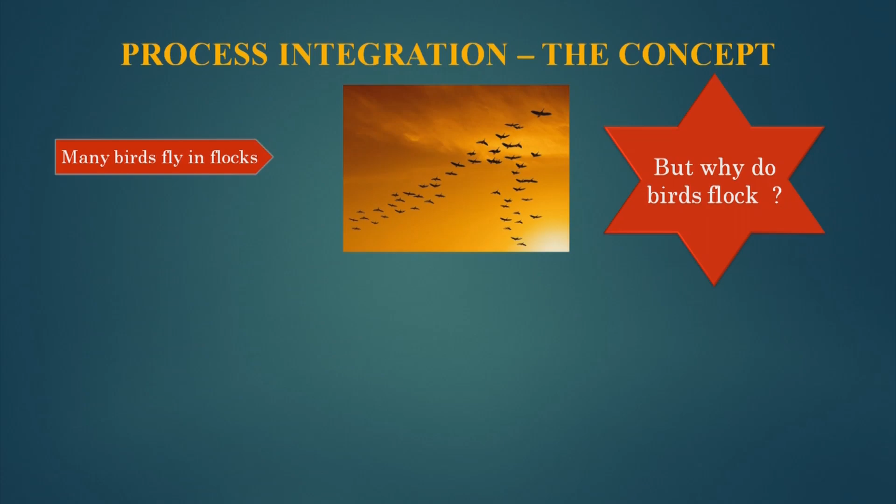There are a number of social factors for this, which include reproduction, protection from predators, communication and navigation, etc.

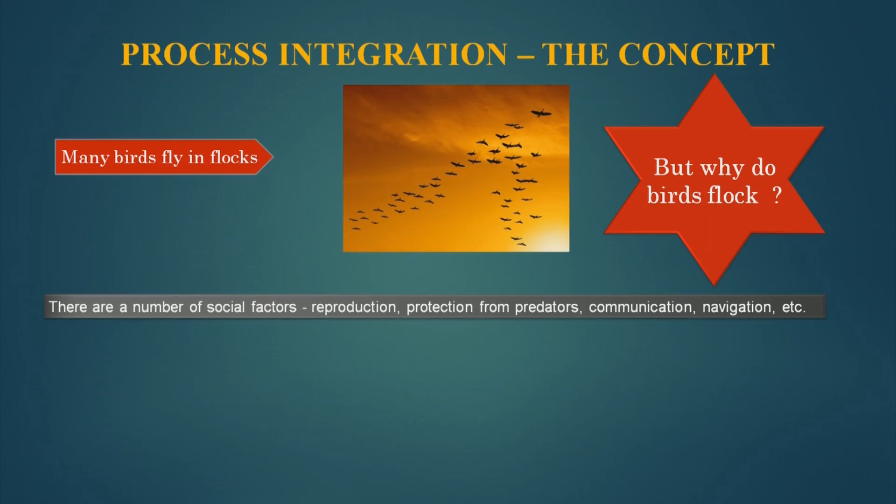But let us look only at the aerodynamic factors for the time being. One theory is that there is an aerodynamic advantage to flying behind and to the side of another bird, to take advantage of its wingtip vortices.

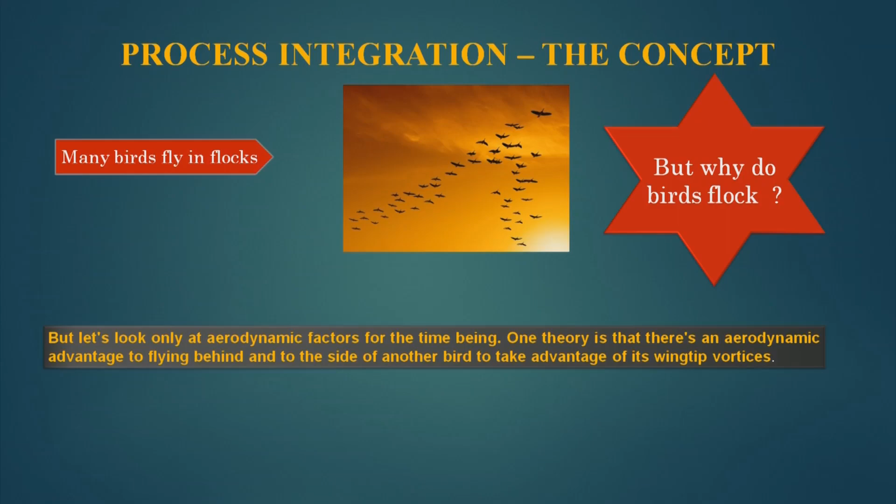Birds fly in a V shape to help conserve their energy during migration. With the exception of the individual leading the group, each bird trailing behind the other benefits from a reduction in wind resistance. This formation reduces the drag force that each bird experiences compared to if it were flying alone.

So it clearly tells that if birds are flying in flocks, they conserve energy, or the per unit consumption of energy, that means consumption of energy per bird in a flock, is less. This is for flying.

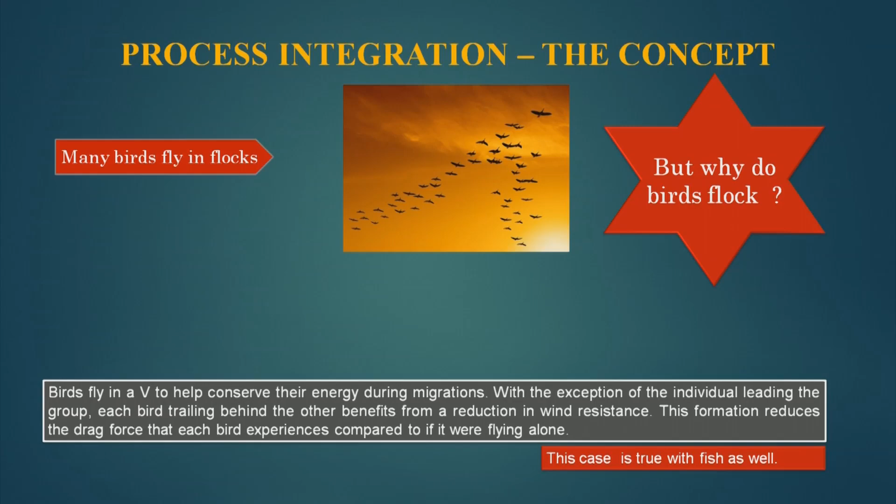The same phenomenon we can see in nature when fish swim. So let us take the case of the fish. Fish swim in schools, and why does this happen? They do this mainly because of two simple facts of nature: one, big fish eat little fish, and two, there is safety in numbers.

The size of the shape and often the flashing of light reflected off thousands of the fish can confuse the predator, but being in a school also means that predators cannot generally eat the lot, and so significant numbers survive.

But these are not the technical reasons for it. So let us see the technical reason why fish swim in schools. There are other reasons for fish to swim in schools.

One reason is that as they swim, their tails sweep from side to side. They set up tiny whirlpools or vortices in the water, which effectively reduces the friction for each fish neighbor. Less friction means less effort, and energy is reduced in swimming.

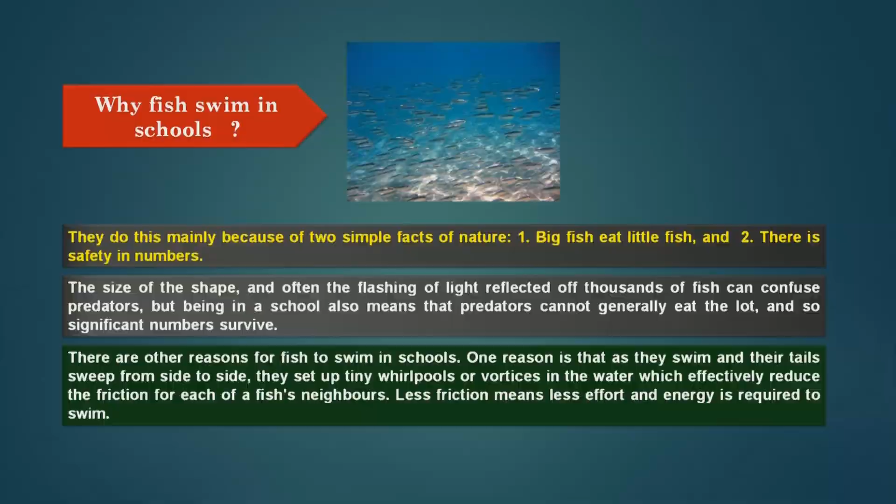That means the techniques which these animals, birds and fishes, apply in nature, there is an inherent concept of integration in them. So when they integrate their flying styles, integrate their swimming styles, they consume less energy. This is also...

Other examples can show this too, like joint family. If we take a joint family, we find that expenditure per person decreases, stress level per person also decreases, and logistics requirement per person also decreases. So joint family, which is an integration of individuals, due to this integration we see these benefits: expenditure decreases, stress level decreases, and logistic requirements also decrease.

A latest concept is aquaponics, where we integrate fish farming with vegetable growing. The fishes help the vegetables grow, and the vegetables also help the fishes in terms of their food. So in nature there are a lot of concepts available where integration helps each other.

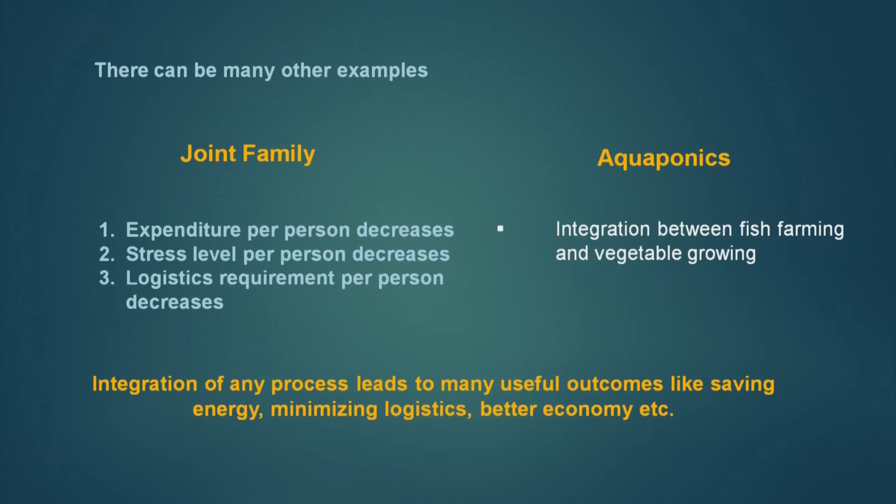Now the question is, do we have a technology which mimics this concept? Because we have learned that together we all win, and this is a new concept available in nature. Can we translate this concept to our industry? So the question is, do we have a technology which mimics this concept?

The answer is yes. It is process integration, or in other words, process pinch technology, which mimics this. So integration is the key to better design and operation. Let us slowly unfold this concept, and we will see how we bring about this betterment in design and operation through process integration.

Let us see an application of process integration in industries. In the older days, when gold was extracted by amalgamation process using mercury, we see that the stirring and other operations are integrated with a water wheel. By integrating, a lot of work can be done simultaneously. This was used in old industries for extraction of gold.

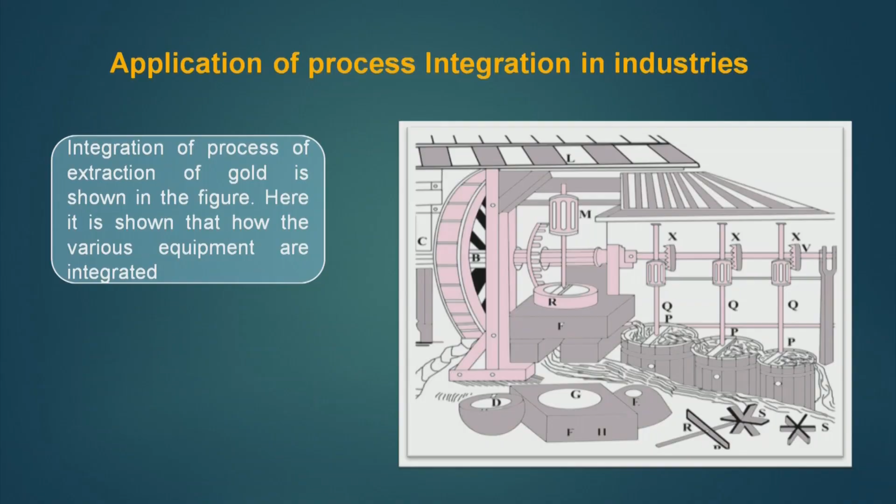Now, the question is, can we decrease this energy loss from the industry through design or through process integration?

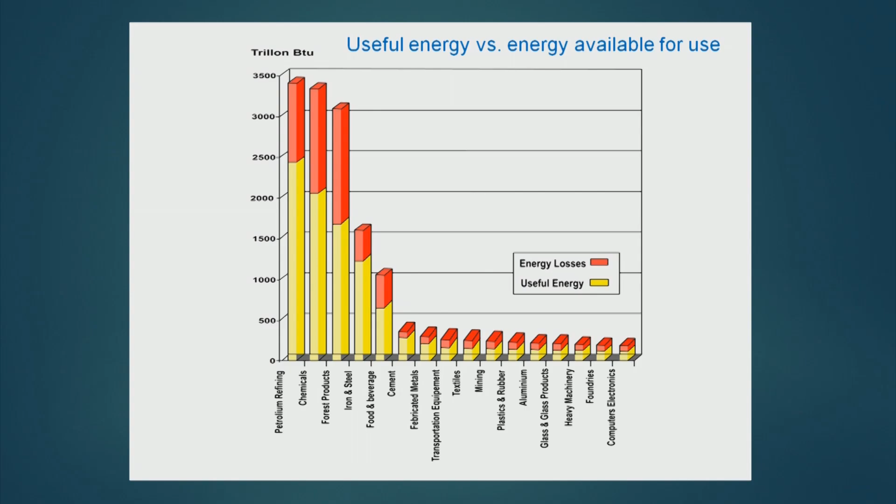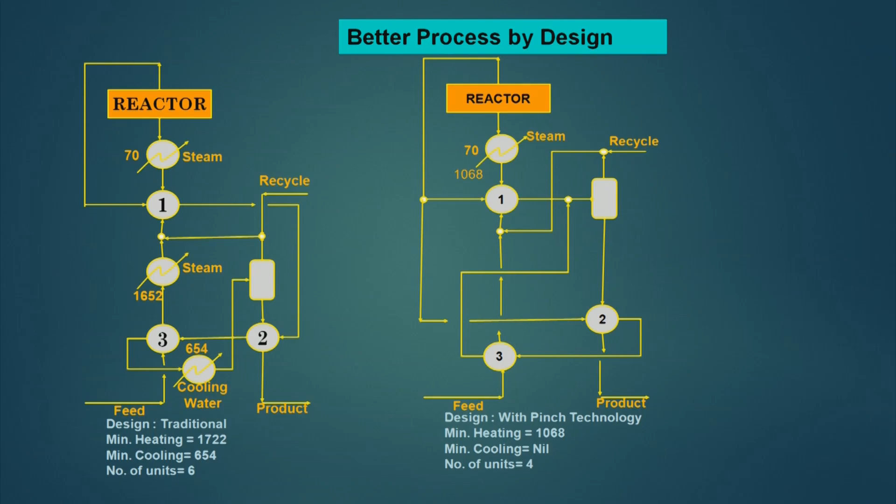When the concept of process integration was applied to this design, the design was simplified, and now it requires only 1068 units of minimum heating. A lot of heating requirement has been decreased, almost 700, some 40 odd units of heating has been decreased, and cooling has been made equal to zero. That means, in the improved design we do not need cooling utility, that is cooling water. That means a complete area of the industry which handles the coolant or cooling utility is now off, we do not even need a cooling tower. So this is a big achievement and big reduction in cost.

Further, the number of units required is 4. That means we are able to save the utilities, we are able to save the number of units required for the operation of this process. In this, we have not compromised anywhere. The output is the same, the stream exit temperatures are the same, and the reactor inlet and outlet temperatures are the same. Everything remains the same, but the process is designed using integration principles in such a way that it gives a lot of saving.

Now, the question is, can this design procedure, the process integration which is based on thermodynamics, help us to save capital cost and energy?

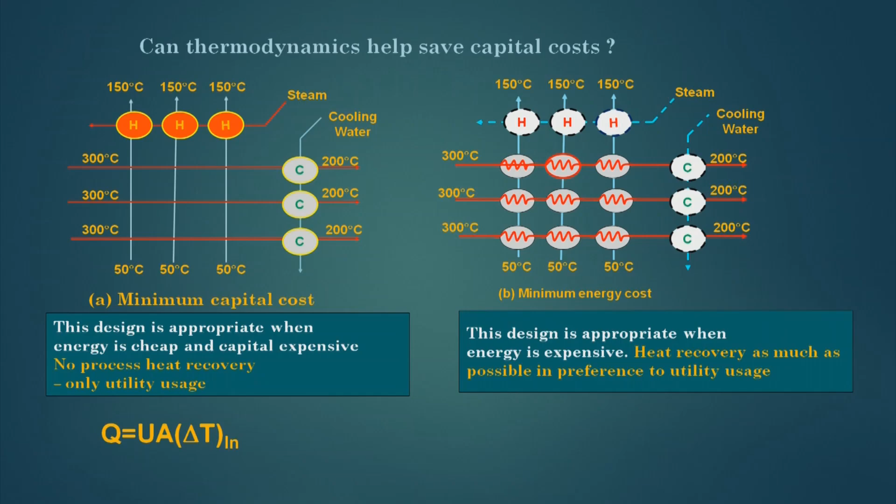So these are two extreme ends of design. In one end, I am utilizing heat recovery completely, and in the other I am not utilizing it at all. So let us compare these two, because I expect that in case B, my fixed cost will be very high, as I am saving energy through process heat recovery. Now, the question is, is this thought process correct?

So, if we quantitatively analyze these two concepts: for case A, where I am using the utilities completely to satisfy the cold streams as well as hot streams, the area requirement is 204 units. Now, in case B, when I am using heat exchange completely, I am not using any utility cost, I am using 3 heat exchangers to exchange the heat, and my area requirement is only 133.

Now, this is a result which is completely against our earlier thought process. The area has decreased, that means the fixed cost has decreased in case B, and I am also saving a lot of utility because I am going for complete exchange of heat in the network. So in both cases I am gaining, in capital cost as well as the running cost.

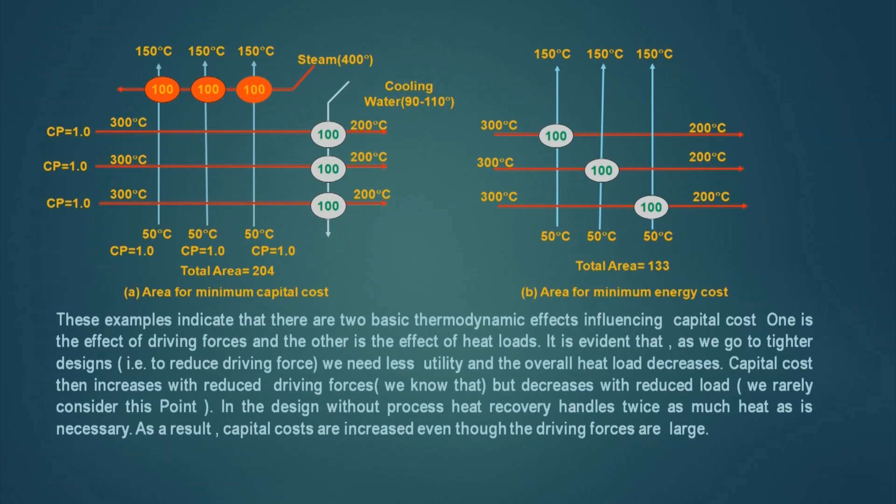And what has happened in this design? In the design without process heat recovery, it handles twice as much heat as is necessary, and hence in part A of the design, the total area requirement is 204, because it is handling twice the amount of heat almost as in the case of B. As a result, capital costs are increased even though the driving forces are large.

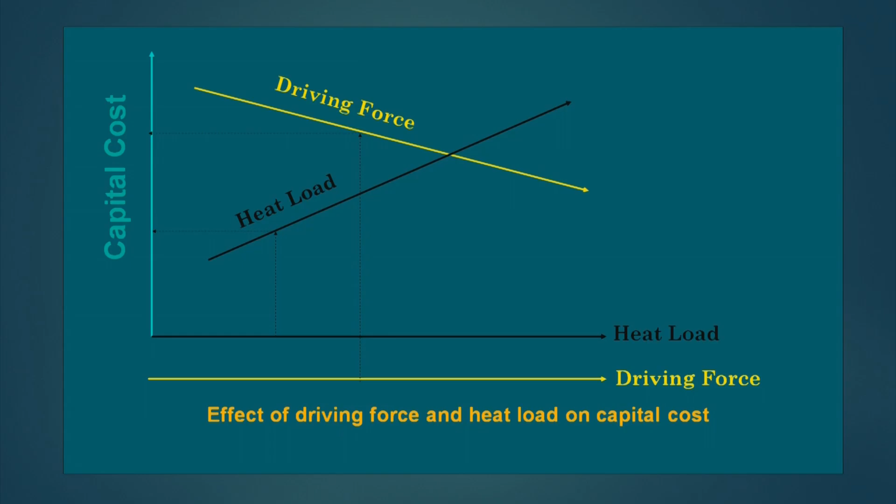This is a new fact which has come out, and hence we saw that even increasing the driving force is not decreasing the area of the heat exchanger, that is the fixed cost, as much as we were expecting, because it increases the heat load. So we cannot apply exactly the formula Q equals U A delta T, because when we are increasing the delta T, Q is also increasing. Q equals U A delta T is applied in those cases when, changing delta T, Q is not changing.

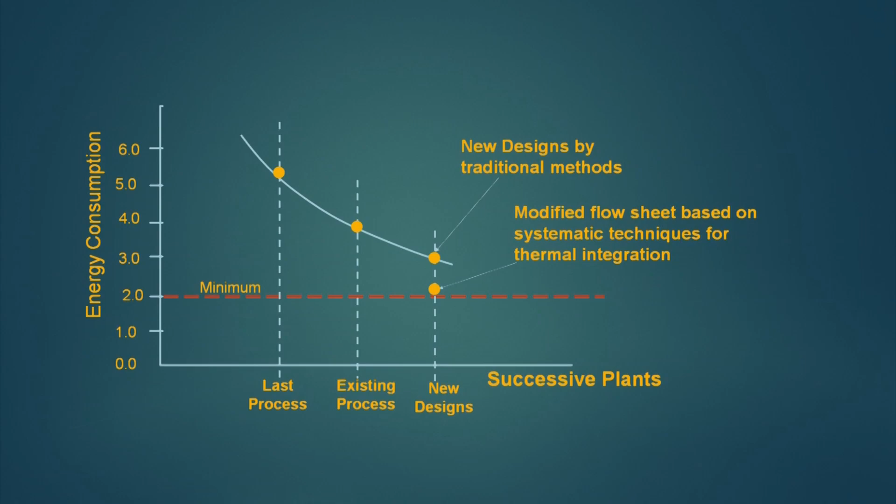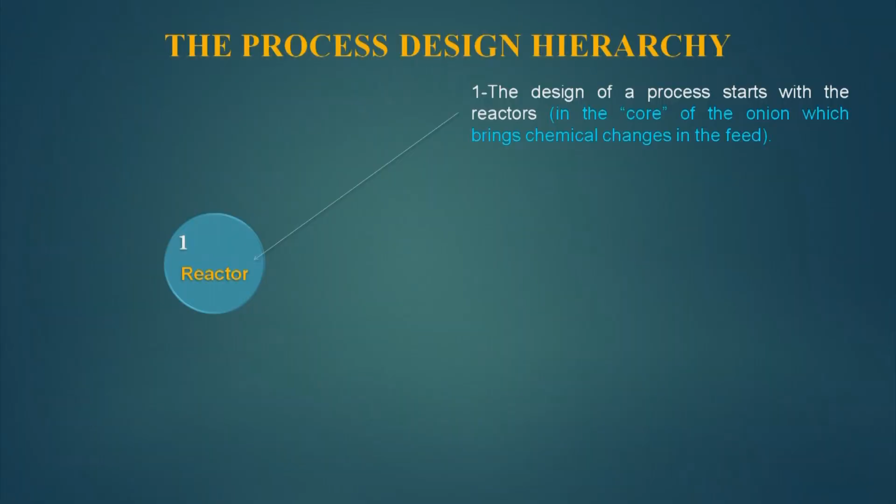Then when I am going for a reactor, if I am converting A to B, B will not only be formed, C and D will also be formed, which are byproducts. So we need a separation process for this. So my second layer is, once feed, products and recycled concentrations and flow rates are known, then we have to design the separators, the second layer, because without separating the byproducts from the product, I cannot sell the product in the market. So my second layer is a separation layer.

Then I have a third layer, called the heat exchanger layer, because for the separation we need energy. Like for example, in a distillation column, two liquid components are separated with heat energy. So based on the requirement of heat for the core and the second layer, the heat exchange network, the third layer, can be designed. And the fourth layer, which is the utility layer. So the remaining heating and cooling duties are handled by the utility system, the fourth layer.

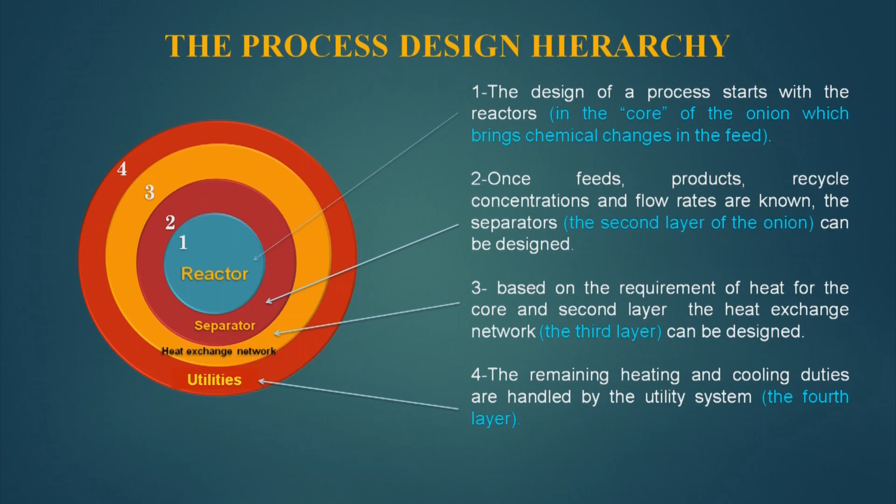So a chemical industry can be visualized as an onion having many layers, and that is why this diagram is called an onion diagram.

Now, the concept of process integration can be used in all the 4 layers. We can use it for reactors, we can use it for separators. In the separator it becomes mass exchange, mass integration, and here it becomes heat integration. And so on the whole onion diagram, we can use our process integration principle.

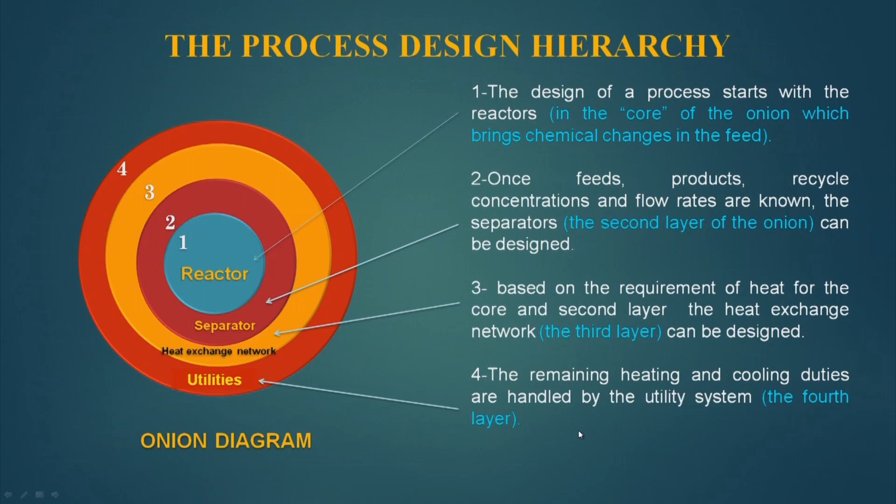Now let us use this onion diagram and connect it to a process flow diagram. This is a process flow diagram. Here the feed is entering, this is a reactor. So in the reactor I am getting output which contains feed, unreacted feed, then products and byproducts.

These are at higher temperature, this exchanges heat with an incoming feed, and then the products, which are the product plus byproducts, it goes to a separation system. At the bottom of the separation system I get product and byproduct, and the unreacted feed goes here.

which exchanges it with a cold utility, comes here, and a part goes from here and it exchanges heat here, and then it is again fed to the reactor. And a bottom product from this, say distillation column, goes here, exchanges heat, meaning it is heated up, and then it goes as feed to this distillation column.

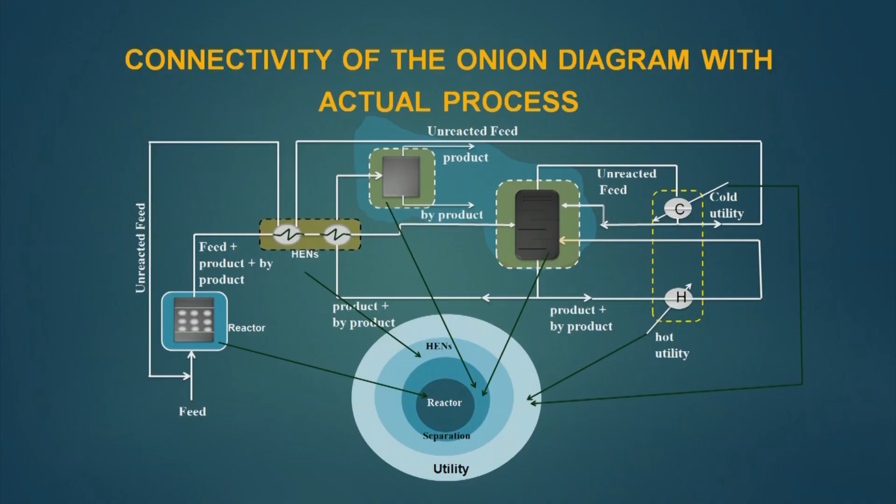Now let us see what process integration is. Let us see some definitions. Process integration, a part of process intensification, is a fairly new term that emerged in the 80s and has been extensively used in the 90s to describe certain systems-oriented activities related primarily to cover almost complete process design. It is a holistic approach to process design, retrofitting and operation of industrial plants, with applications focused on resource conservation, pollution prevention and energy management.

It enables the process engineer to see the big picture first and the details later. In process integration, we draw the big picture first. We believe that if the big picture is correct, then we should go for the details later on, meaning we can analyze the details later on. The first aim is to create the big picture first, and this big picture is created using process integration.

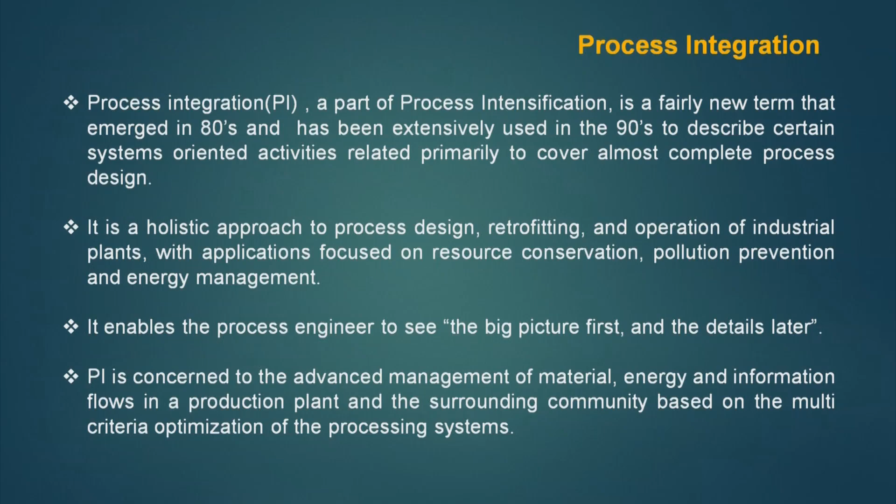Process integration is concerned with the advanced management of material, energy and information flows in a production plant and the surrounding community, based on the multi-criteria optimization of the processing systems.

Now, if you see the definition of PI, there are many definitions which were given by different people. One definition is: it is a systematic and general method for designing integrated production systems ranging from individual processes to total sites.

With special emphasis on the efficient use of energy and reducing environmental effects. Another definition is process integration is seen as a group of methods to optimize the use of energy, but with concerns for environmental aspects.

Rossiter and Kumana in 1995 gave this definition: process integration methods focus on ensuring that existing process technologies are selected and interconnected in the most effective ways, rather than attempting to invent new types of equipment or unit operation. This definition slightly touches the potential synergic effects which will be achieved by integration.

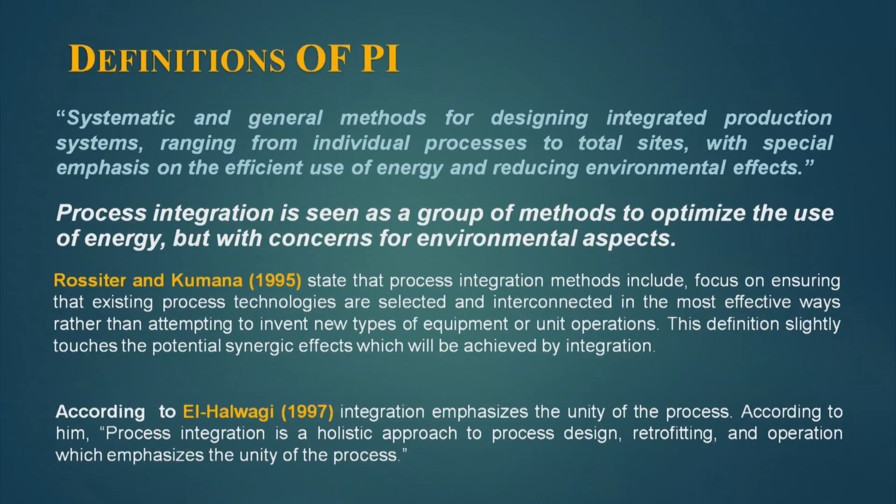Other definitions: in 1997, the IEA, International Energy Agency, broadened their definition of process integration to mean the application of methodologies developed for system oriented and integrated approaches to industrial process plants designed for both new and retrofit applications.

Later, Natural Resources Canada in 2003 defined process integration as all improvements made to process systems, their constituent unit operations, and their interaction, to maximize the effective use of energy, water and raw material.

According to Friedler, in 2010, process integration has been defined as a family of methodologies for combining several processes to reduce consumption of resources or harmful emission to the environment.

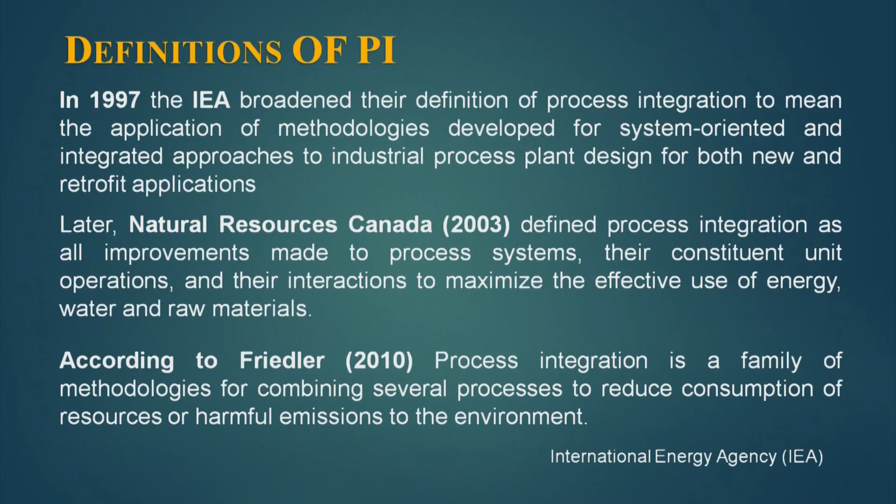So what we saw in these definitions, the concept of integration is the concept of integration of equipment. Why? To decrease the energy required for the process and to stop or decrease the harmful emissions.

Now, if you see the evolution of process design from history to the future: in the first generation, process design used to start with experiments in a chemist laboratory and then tested in pilot plants before plant construction. Then came the second generation.

Here we use the concept of unit operation, and unit operation acted as building blocks for engineers in the design process. Now, in the third generation of process design, the concept of integration came into picture.

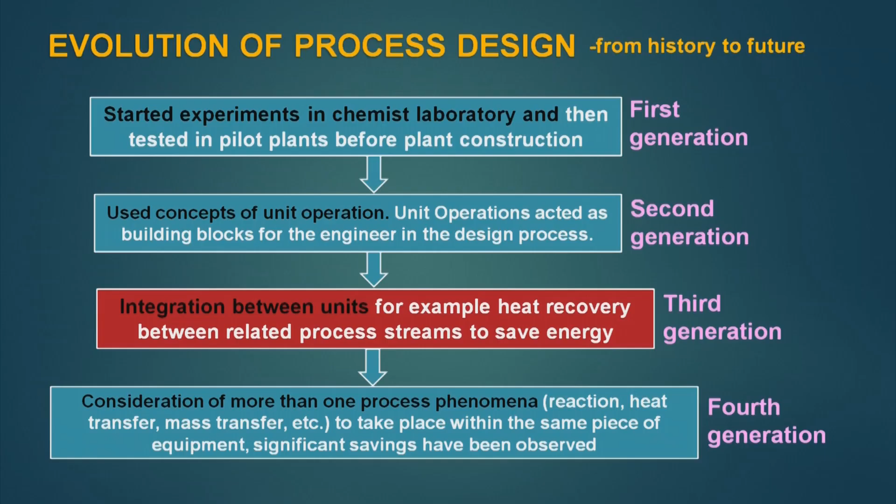So the integration between units came into picture, for example, heat recovery between related process streams to save energy. And in the fourth generation, we considered more than one process phenomena taking place in equipment - reaction, heat transfer, mass transfer etc. - to take place within the same piece of equipment, and by doing this significant savings can be observed. It is a part of process intensification, which is a fourth generation process design concept.

Now let us see the current status of process integration. Process integration is a strongly growing field of process engineering. It is now a standard curriculum for process engineers in both chemical and mechanical engineering at most universities around the world, either as a separate topic or as part of a process design or synthesis course.

Research at UMIST in this area for the last 27 years or so has been supported by a large number of industrial companies through a consortium established in 1984. As part of the International Energy Agency IEA project on process integration, 35 other universities around the world are involved in this research field. So this shows you the current status of process integration, how much work is being carried out in different universities of this world.

Now let us see the classification of process integration methods. This hierarchical analysis can be divided into 4 quadrants. The first quadrant is interactive and qualitative, the second is qualitative and automatic, the third is automatic and quantitative, and the fourth is quantitative and interactive.

Now if you see the first quadrant, we use heuristic rules, and this gives insight about the design and economy. Now if you see the second quadrant, here we use knowledge based systems. These are rule based approaches with the ability to handle qualitative or fuzzy knowledge.

In the third quadrant, we use optimization methods. So these are the methods which can be used for process integration purposes. In the optimization methods, we use deterministic, mathematical programming and non-deterministic methods.

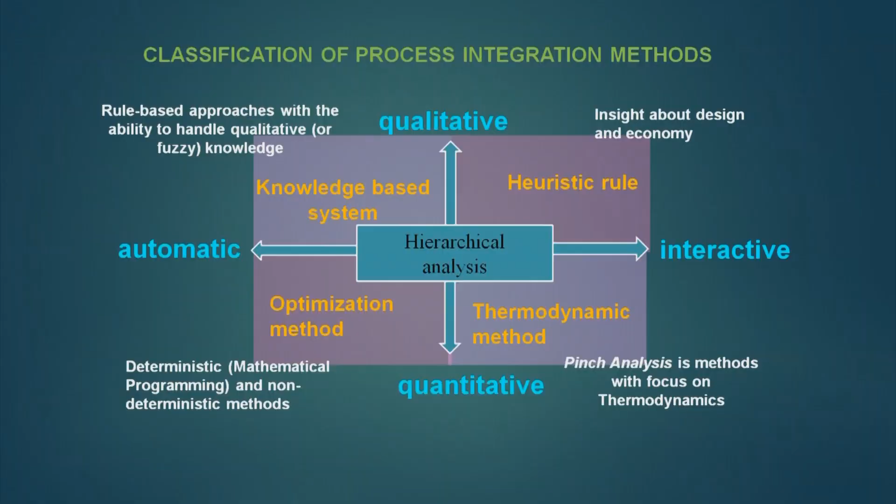And the fourth one, which is quantitative and interactive, here we use thermodynamic methods, and pinch analysis has become very famous, based on thermodynamic method with focus on thermodynamics. So how process integration is tackled is shown by these 4 quadrants, and each quadrant can handle the process integration processes. But the pinch technology area, which falls in the 4th quadrant, is the scope of this lecture series.

Now, the techniques for process integration, let us see what are the different techniques which are available for process integration. The pinch technology approach, which we have seen in the 4th quadrant, can solve it. Process graph theory can also be used for process integration purposes. Genetic algorithm approach, which is basically an optimization technique, can be used for process integration. State space approach can also be used, and MILP and MINLP approaches can also be used for process integration.

So, process integration has a profound effect on the chemical process industries in the form of pinch technology and heat exchanger network optimization, which we have seen in the 4th quadrant.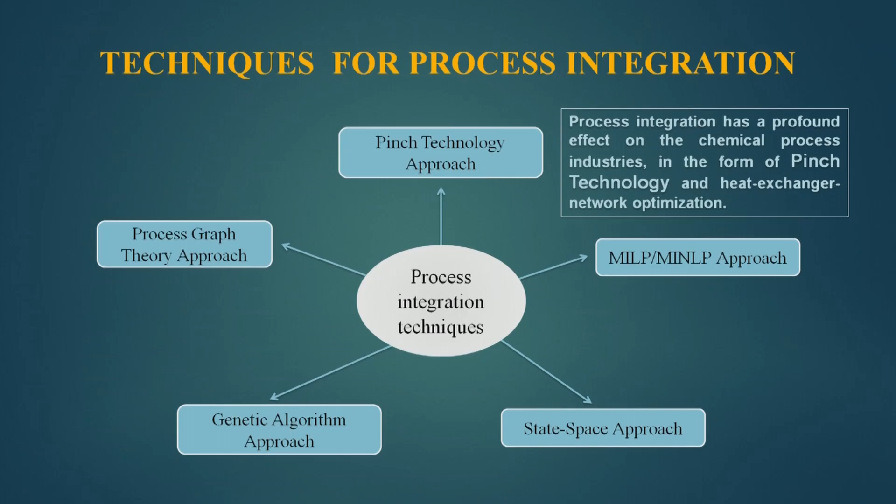Now, as this method is becoming very popular, it can be used for several applications. If you see the applications, we see energy integration, which we can use for heat exchanger network design, for cogeneration and total site targeting, for distillation column targeting, for batch process targeting and optimization, and for low temperature processes. So, when we talk about energy integration, these 5 topics come to mind.

Then it can also be used for hydrogen management in refineries. Basically, if you see the PI applications, we go for heat integration and mass integration, and hydrogen management in refineries falls under mass integration. So, if you see mass integration also, here we can go for water and wastewater management and recovery of valuable materials.

Then for pollution prevention we can use it, basically it is a mass integration and energy integration process. We can go for carbon constrained energy sector planning, water and wastewater management, recovery of valuable materials, and emission targeting in this application area.

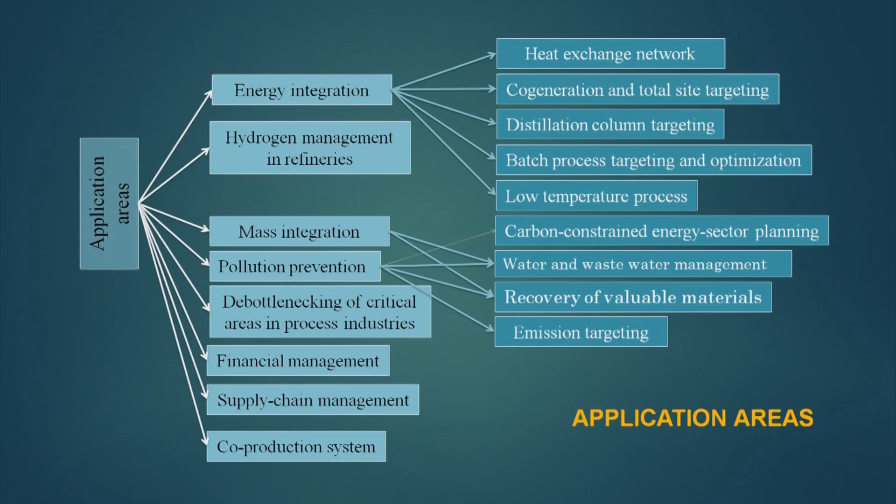Then we can go for debottlenecking of critical areas in process industries using pinch technology. We can even use it for financial management, for supply chain management, and for co-production systems. So, we see here that pinch technology or process integration has got a broad area of application.

Now, to show you how broad this application has become, let us see the analogies for application of the unified targeting algorithm, UTA, to diverse integration problems. Shenoy in 2011 suggested a single algorithm to establish minimum resource targets for diverse process integration problems, including those of heat and mass exchange, water, hydrogen, carbon emission and material reuse networks, and proposed the unified targeting algorithm, UTA.

Now, if we see this, we see only a part of it, that is heat and mass integration. So, the variables for heat exchange network, the level or quality is temperature, that is the driving force is temperature. For mass exchange network, the driving force is composition or mass ratio. If I say the flow of quantity, for heat exchange network it is heat capacity flow rate, and for mass exchange network it is mass flow rate in kg per second.

Load or quantity, for heat exchange network this is heat load, and for mass exchange network this is mass load. High level resource or utilities - for heat exchange network this is hot utilities, that is steam, hot water or Dowtherm, and in mass exchange network this is process MSAs. For low level resources or utilities, the cold utility is used for heat exchanger network, and for mass exchanger network this is external MSAs.

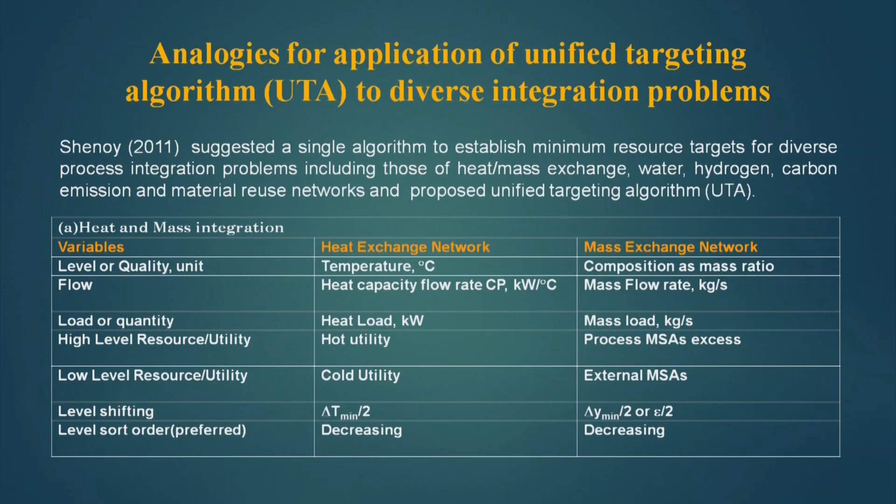Level of shifting used for heat exchanger network is delta T minimum by 2, and for mass exchange network we use delta Y minimum by 2, or epsilon by 2. And level sort order, when sorting the temperature levels or concentration levels, is in decreasing order - also in the mass exchange network it is decreasing order. So, Shenoy has given a unified algorithm for the utilization of PI in different areas.

Now, let us come to the pinch technology, which is a technology used for process integration. It is a methodology for minimizing energy consumption of processes by computing thermodynamically feasible energy targets or minimum energy consumption and achieving them by optimizing heat recovery systems, energy supply methods and process operating conditions. It is also known as process integration, heat integration, energy integration or pinch technology.

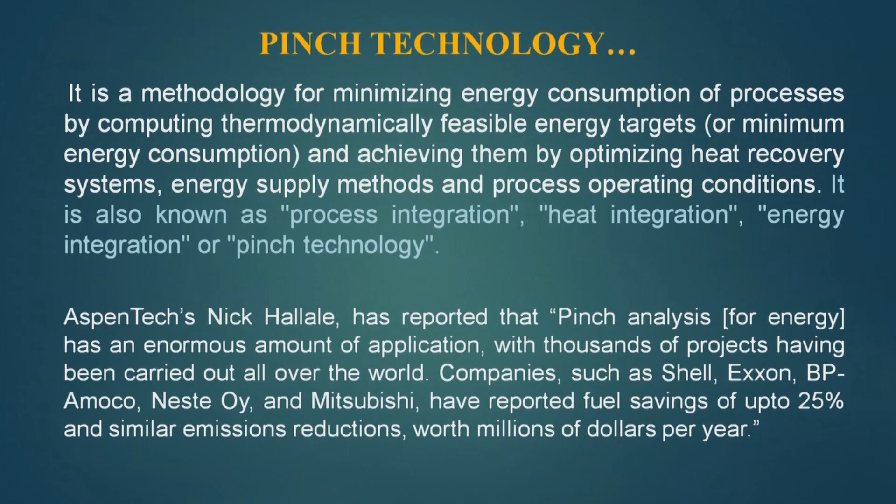AspenTech's Nick Hallale has reported that pinch analysis for energy has an enormous amount of application, with thousands of projects having been carried out all over the world. Companies such as Shell, Exxon, BP, Amoco, Mitsubishi have reported fuel savings up to 25% and similar emission reduction worth millions of dollars per year. So it shows the effectiveness of the pinch analysis and how this analysis is saving energy and reducing pollution worldwide.

Among process integration methodologies, pinch analysis is currently the most widely used, because it provides a lot of insight when designing. This is due to the simplicity of its underlying concepts and especially to the spectacular results it has obtained in numerous projects worldwide. It is a systematic methodology based on thermodynamic principles to achieve utility savings by better process heat integration, maximizing heat recovery and reducing the external utility loads, that is cooling water or heating steam.

Pinch technology is a well proven method in industries such as chemical, petrochemical, oil refining, paper and pulp, food and drinks, steel and metallurgy, etc., leading to an energy saving of 10 to 35%, water saving to the tune of 25 to 40%, and hydrogen saving up to 20%.

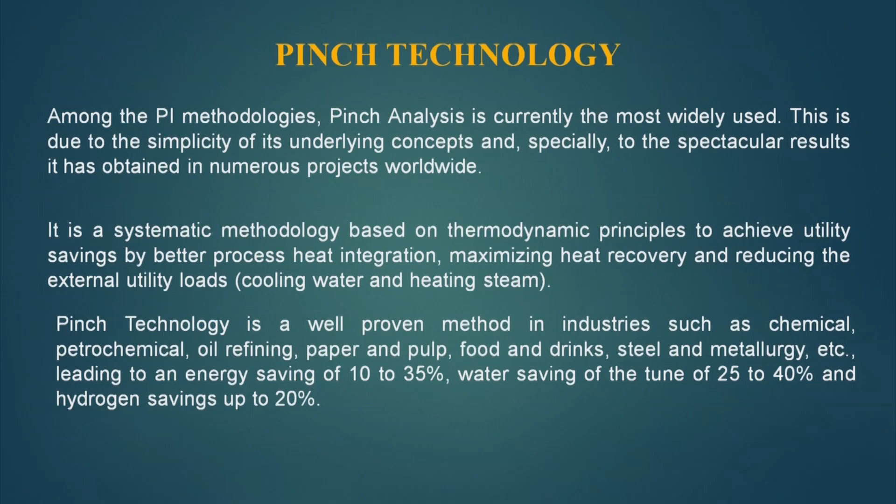Now here we see some graphical representations of the savings which can be done. In the oil refining sectors, the saving is from 10 to 40%, and here we are talking about potential energy saving due to heat integration. In iron and steel industries, it is 11 to 50%. For chemical industries, about 15 to 40% saving can be achieved. Paper and pulp, 10 to 35% of energy saving can be achieved. Food and drinks industries, 7 to 45%, and textile about 3 to 25% energy savings can be done using pinch technology.

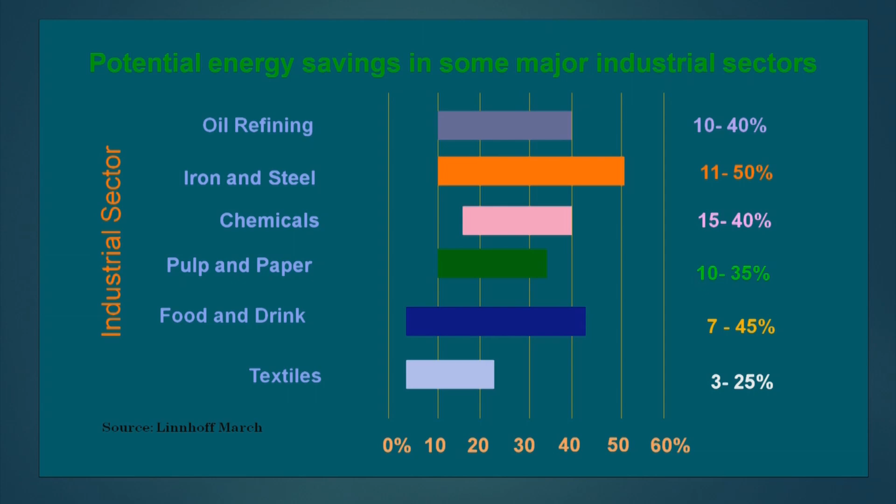Now if you go for the water savings, the same technology, called water pinch, if applied on industries like oil refinery, it can save 10 to 40% of the water. For bulk chemicals, 25 to 35%, for specialty chemicals, 20 to 60% water saving, pulp and paper 10 to 30% water saving, food and drinks 30 to 40% water saving, and others like textile, polymer, etc., 20 to 40% water saving. So this is a huge amount of saving which can be done using process integration when applied to our industry.

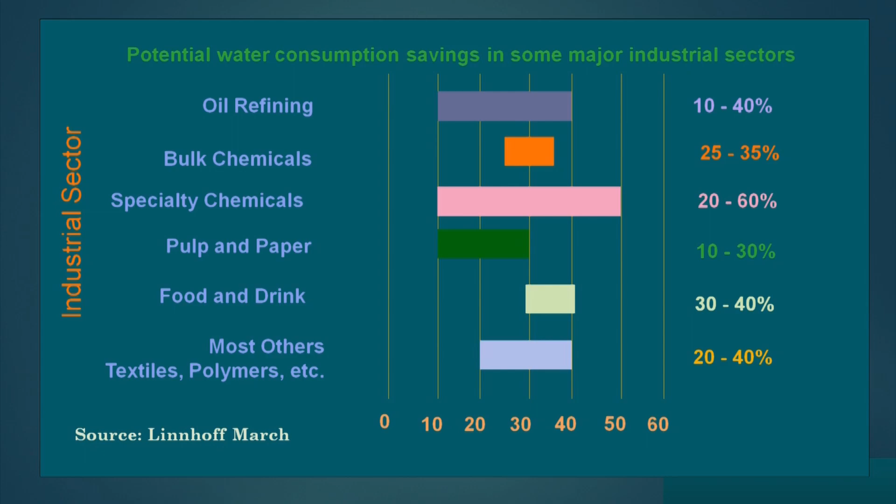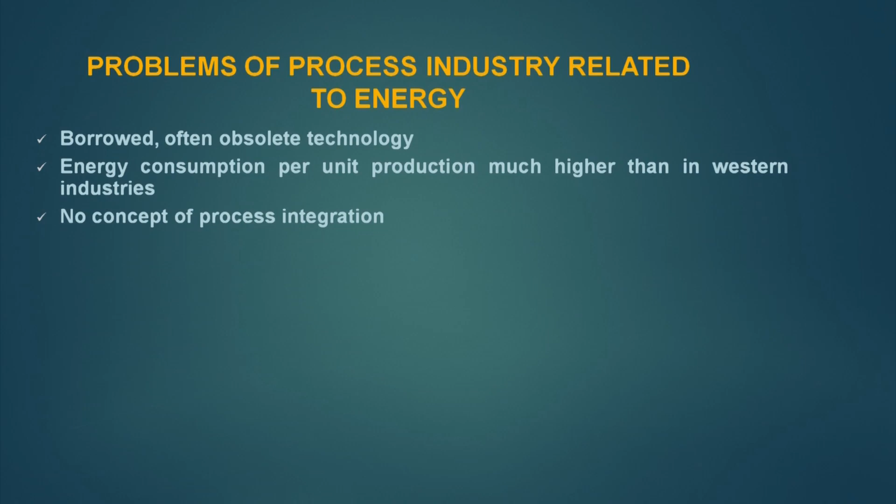Now, the problems of process industry related to energy is that most of the industries in the third world use borrowed, often obsolete technology. Energy consumption per unit production is much higher than in western industries, with no concept of process integration. So the energy management through process integration has become a reality. The problems of Indian industry can be solved by using techniques that minimize energy consumption with minimum investment using this process integration technique.

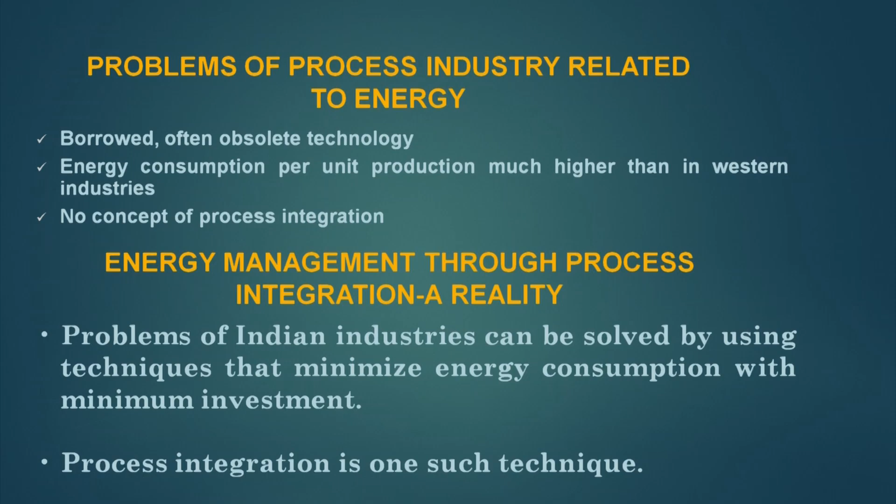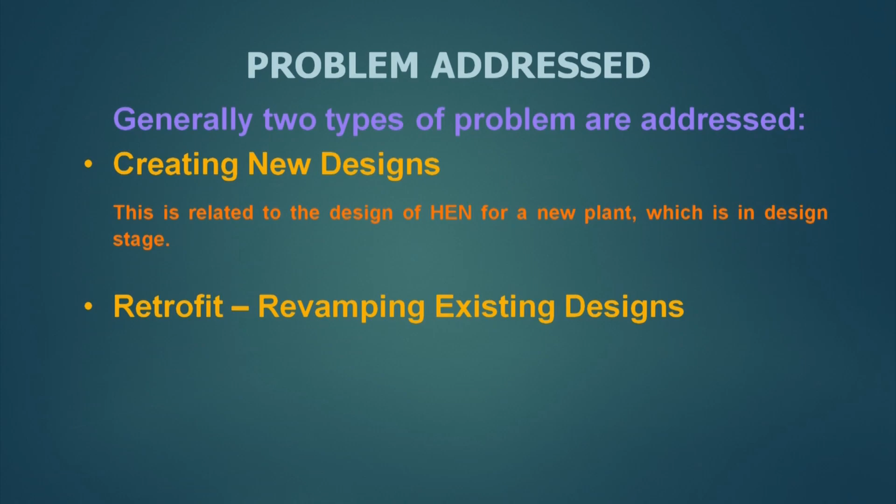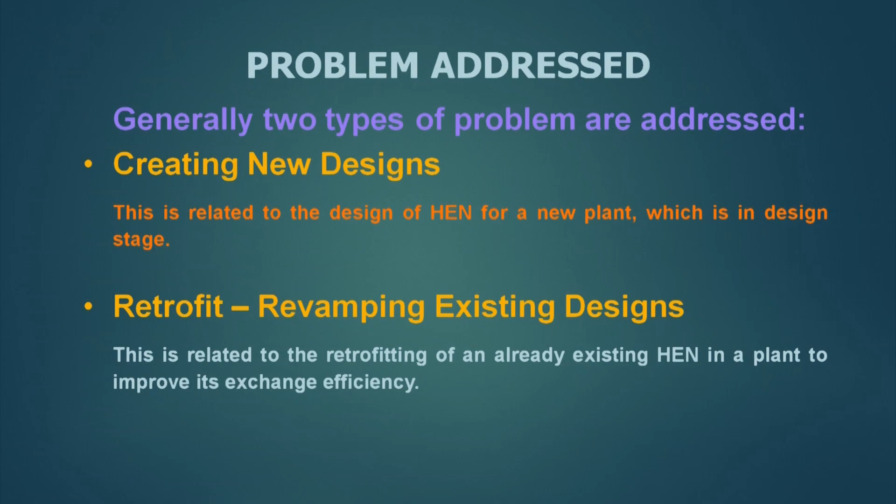So process integration is one such tool which can do a lot of good for our industry. Generally problems which are addressed are of two types. One is called creating new designs, related to the design of a new plant which is in the design stage, and the other is called retrofitting or revamping of existing design. If you have an existing design, we can still apply process integration or pinch technology to cause saving. This is related to the retrofitting of an already existing heat exchanger network in a plant to improve its exchange efficiency.

Now, how does it work? First we take the problem where we want to apply pinch technology or process integration, then we collect the data, then we transpose to stream problems, and then we draw composite curves. Then we define our targets, which can be energy targets, area targets, number of units targets, number of shells target, it can be cost targets, etcetera. Then we design to meet those targets, so design with pinch rules, and then we transpose back to a new PFD.

So we start with a PFD of the existing plant, and then we give a new PFD based on process integration. And if this new PFD is implemented, then a lot of saving can be done. So once the PFD is with us, then we go for simulation and feasibility checks, and once we are satisfied with the simulation feasibility check, then this final design is accepted and implemented in the industry.